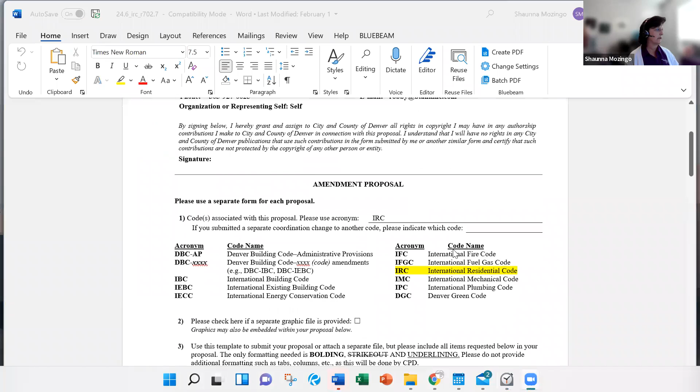All right, well, with that, the first item on the agenda is item number P 24.6, which is for the IRC's section 702.7. The proponent for that is Robbie Schwartz. So we will bring Robbie over.

Are we just making him allowed to talk or actually bringing him over as a panelist? Everybody's doing it differently. Allowed to talk is easy. Okay. All right. Oops. Did I do that? Robbie? Hi, I'm here. Okay, perfect. Go ahead, Robbie.

Hi, this is Robbie Schwartz with Build Tank Inc. Thank you for the opportunity to bring this proposal back with modification. And I don't think that the modification is showing. This is what I downloaded off of Denver's website. Is there a modification that you sent me or to Erica? I sent it to, I forget. I believe I sent it to you and Erica. I don't remember for sure. Let me see if I can find it real quick. Sorry. I can share my screen in the short term if you'd like me to. Okay, let me see.

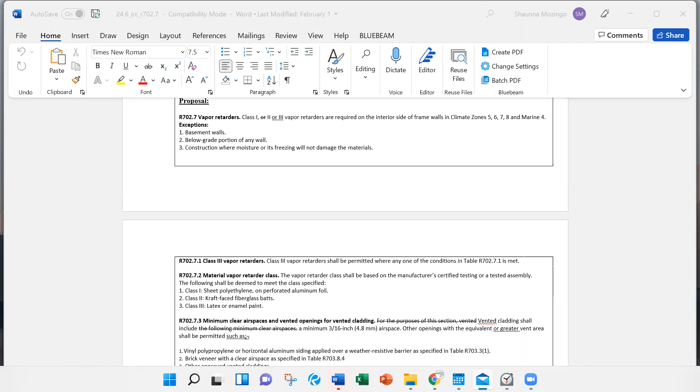And I got it off the Denver IRC site. Oh, you did? Huh, because I downloaded these just like last Thursday. There might have been some changes in between then, Shaunna. Okay. All right, well, maybe I'll just real quick. This is to be a good lesson in how to find those proposals on Denver's website, right? So here you go. City. Well, it would if I could type correctly. There we go. I had a quick link on there. All right, so all of them are on here. They're in the IRC. And this is for 702. I took it from the agenda. It should be the same link. Oh, there it is. Yep, that's it. Okay. Sorry about that. Great. So here's the proposal amendment.

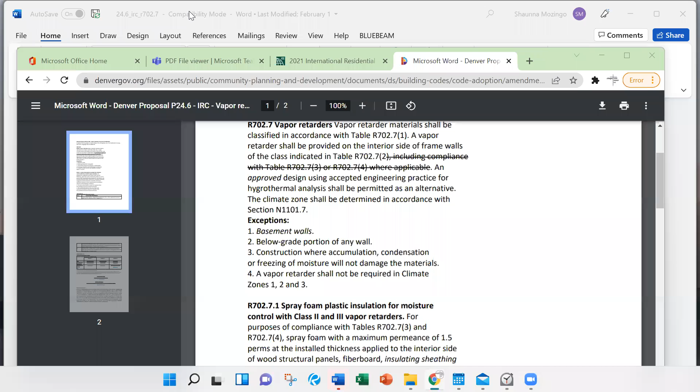Okay, so thank you again. This is Robbie Schwartz at Build Tank Inc. Thanks again for the opportunity to bring this proposal back. Nate and myself have met and listened to what the committee's questions and concerns were. And what it came down to is that vapor transport occurs via vapor diffusion through the wall that the vapor retarder is trying to manage, and also through air leakage into the wall. We're really fortunate in Colorado that we live in a forgiving climate, and that vapor diffusion is a small process of the vapor transport mechanism. And we're required to build our houses to at least 3 air changes per hour. So we're basically addressing the issue of vapor transport into our wall assemblies via air leakage into those assemblies.

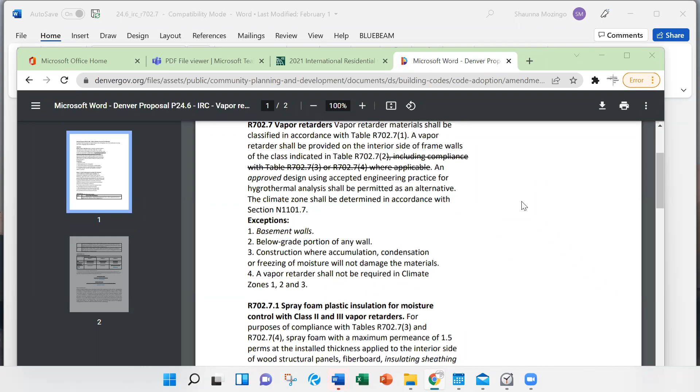So Nate and I have amended this proposal in 2 ways. First, we realized that we were using the wrong version of the code. And so we put in the correct version of the code for the baseline, which is the 2021 IRC. And then we took out tables R702.7(3) and 702.7(4), which are the tables that give you an explanation of when and how you can use a class 3 vapor retarder. And instead of that, in table 702.7(2), we put that class 3 vapor retarders are permitted. Therefore, a builder has a choice in our climate zone of using either a class 1, 2, or 3 vapor retarder in their home.

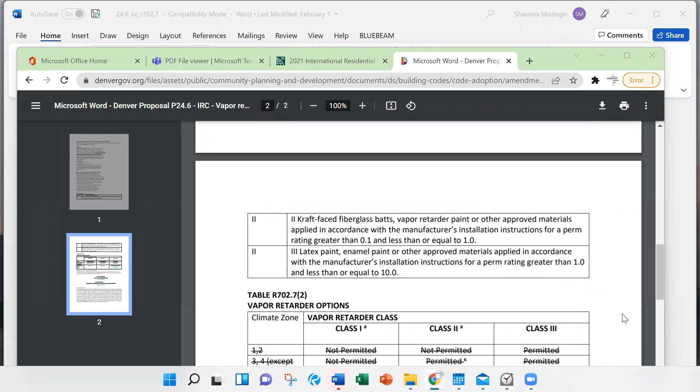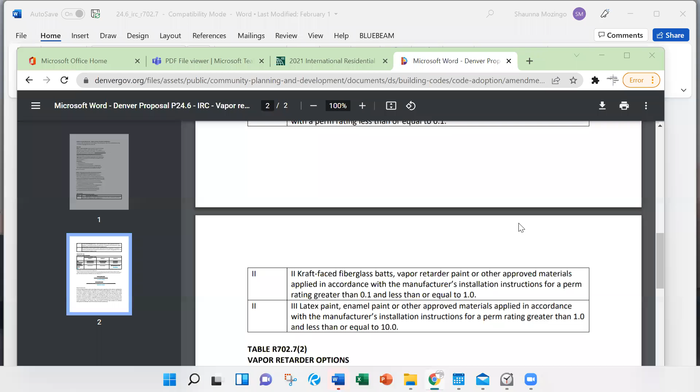And because we don't have a lot of moisture in our wall assemblies in the first place, and because we haven't seen issues with dew point condensation that would require foam exterior insulation, and because vented claddings can happen in other ways than described by those tables, we believe that this proposal allowing class 3 vapor retarders best represents what builders and the code jurisdiction of Denver should be promoting for houses in our climate zone.

Thank you, Robbie. It's just moderating too many hearings, I think. I forgot that we had introduced this last time, and there were some questions, and you guys agreed to work on it and bring it back. It's all coming back to me. So one thing that I would note is in this table 702.7(1), this is class 1, class 2, and this should be class 3, I'm guessing. Yes. So, but other than that, all right. So this was something that got discussed last time. We asked them to modify it and bring it back, and so they did.

So now we're going to go to the public. Thank you, and ask if there is any testimony in support of this proposal. For some reason, oh, there we go. Any testimony in support? Nathan. Oops. There we go. Nathan.

Yeah, so this is Nathan Scribdo with Brookfield Properties. Like Robbie was saying, I worked with him on modifying this, and it helps basically set the code up for our climate zone so that we are adjusting it to what we see here in Denver, and not trying to use just the generic class or

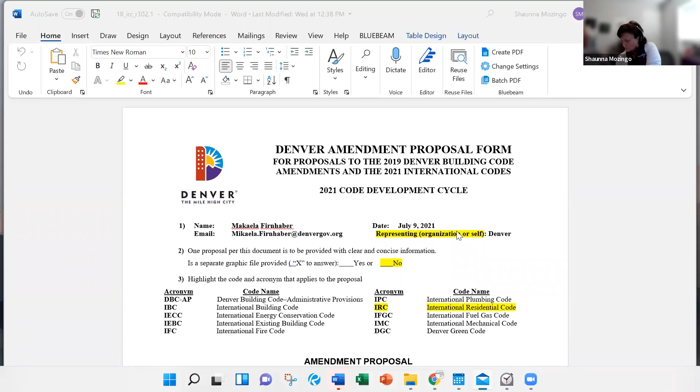All right. So then that brings us to item number 18, which is IRC 302.1. I believe this is the right one. No, that's not the right proposal. Well, I had these all in order at one time. At least I thought so. All right. Is this one? It says 302.1, but this is what's coming up under 18. Is this not number? This is 13. I don't know why this is happening. All right, I'm going to get rid of all of them.

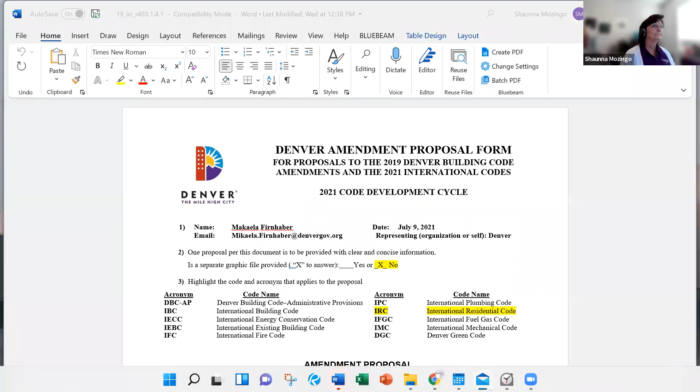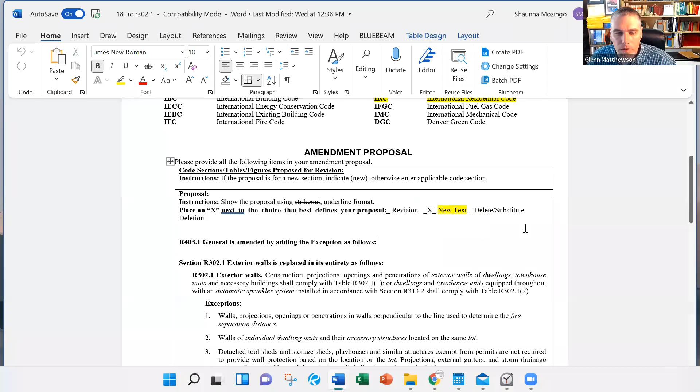Shaunna, I think there's a typo error on that. You notice the first part said R403.1 general. Yeah. That should not be there. Okay, because I'm like, wait a minute. Yeah, once you get past it, keep scrolling. I apologize. I'm not sure. I don't know. For the committee, you can just strike that. That is not meant to be part of this proposal. Okay, all right. So I looked at that and I was like, uh-oh, I have the wrong proposal. Yeah, that's why I spoke up. All right, thank you so much.

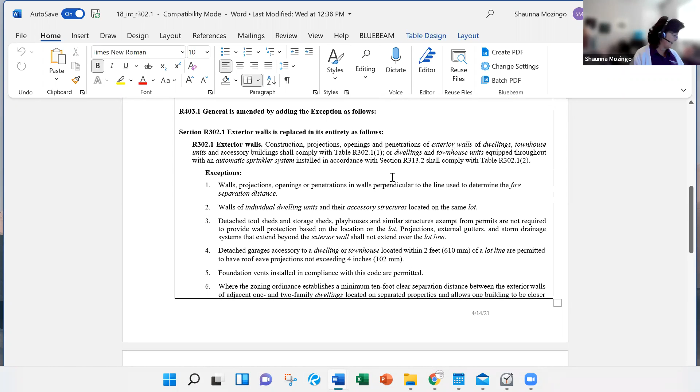All right, so this is R302.1 for exterior walls. The proponent was Makaela. I believe Makaela is out, but somebody else is presenting. So go ahead. I think Austin, maybe? Or who's presenting? I believe it's Casey. Okay. Hi, I'm Casey Vesque, plan reviewer for City and County of Denver. I'm representing Makaela, who wrote this, who is representing the city. Thank you. I think I got that right.

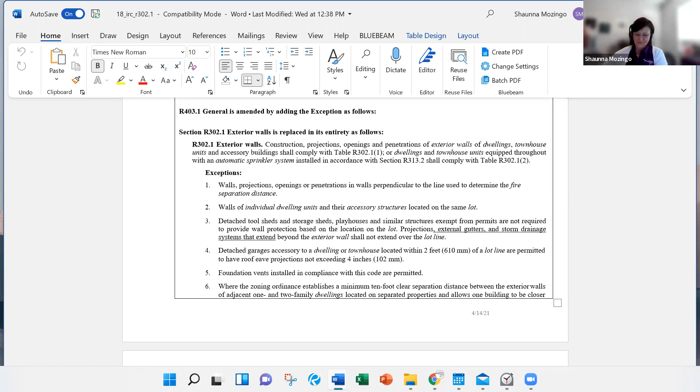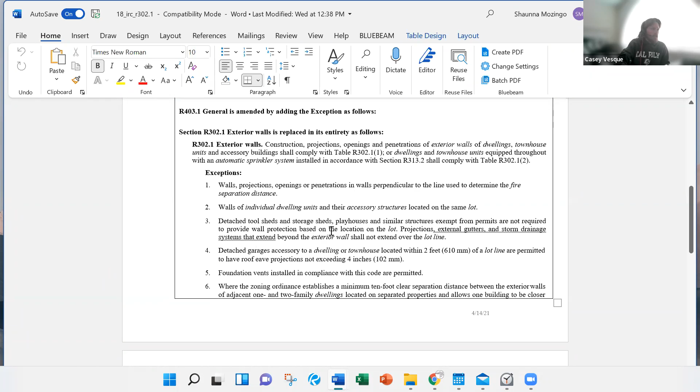Yep, perfect. So this one is about the fire separation distance, and basically adding external gutters and storm drainage systems to projections in exception number 3, and adding exception number 7: external gutters and other storm drainage systems are not considered projections.

The purpose of this is to reduce the misunderstanding of the public regarding how to measure fire separation distance for projections when external gutters are installed. Denver staff is currently interpreting the code such that external gutters are not part of a projection beyond an exterior wall for the sake of fire separation distance.

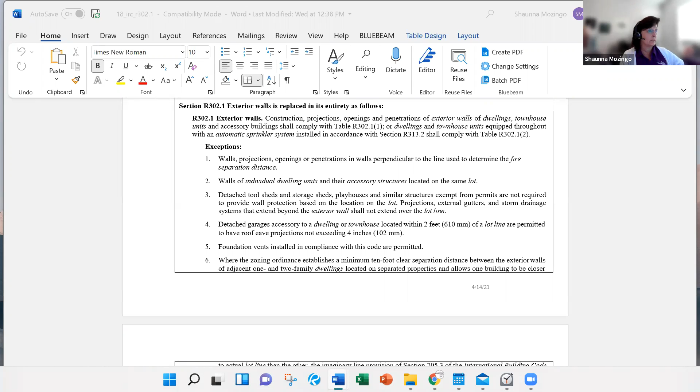Excellent. Thank you very much for presenting that. All right, we're going to go to the public. Is there any public that would like to speak in favor, in support of this proposal? Any public wishing to speak in support of this proposal? Any public in support? Any public wishing to speak in opposition to this proposal? Any public wishing to speak in opposition? No opposition? All right, seeing none, I will go back to the committee.

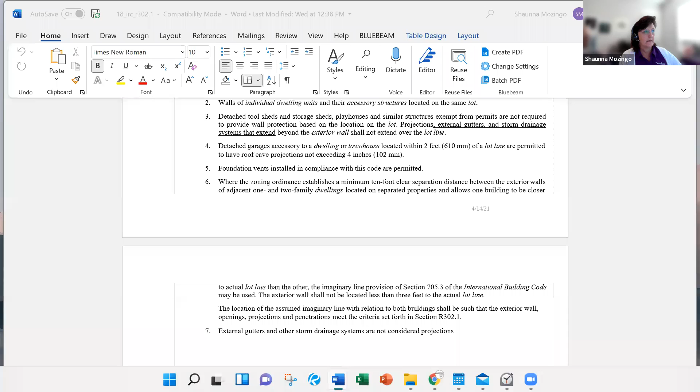Committee, do you have questions of the proponent? Anybody have questions? No questions? All right. There was no testimony from the public, so nothing to rebut. So I will look to the committee for a motion, so that we can open discussion. Kate? I'll make a motion to approve this code change as written. Okay, perfect.

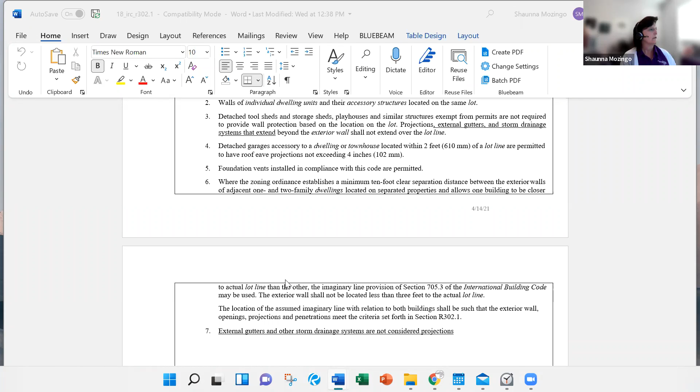All right, there's a motion for as submitted. Is there any second? Casey? Are you seconding? Yes. All right, so we have a motion and a second for as submitted, this proposal. Is there any discussion? Anybody wishing to discuss this proposal? Well, all right. Seeing none, then we will go to the vote.

All of those committee members in favor of this proposal as written, please raise your hand. One, two, three, four, five, six. That's a unanimous vote of 6-0 because we only have 6 voting members present. All right, so that proposal passes unanimously, 6-0. All right, with that, then we will go to, hopefully I have the right version of the proposal, 79B.

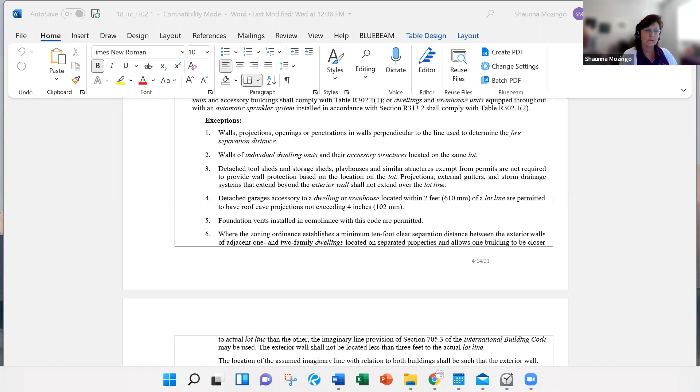Oh, Shaunna, I think Kristen Salinas is trying to get into the meeting right now. You might want to move to the next one and then come back to this one. Okay, that works because I need to find the version you gave me anyway. All right, so we're going to postpone 79B for a moment and get to P13. So P13, right here. Let me get rid of this proposal so it's not in our way. All right, I'm just having a real great time here. There we go. Proposal P13, Alicia Bock, dealing with IRC section 403.1.4.1 frost protection.

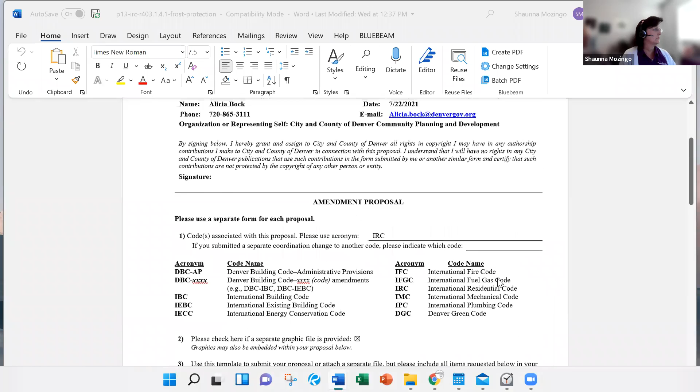All right, is the proponent here? Let's see. Is the proponent here for this, for Alicia or somebody else representing Alicia on this proposal? Nobody to present. Okay. I can speak for it if needed. That's my role. Yeah, that would be fine. Sure, thank you, Glenn. For those of you who don't know, Glenn Mathewson is the subject matter expert serving this committee.

Yeah, so the concerns with this one are the terminology used currently in section 403.1.4.1, "extended below the frost line," as if you would need to excavate further than the 36-inch established frost line depth. And that's generally not how that is really interpreted, beyond even just Denver; most places will interpret this as simply excavating to the frost line. And so that's what this is doing, just adding some clarity that for the Denver 36-inch frost line, you only have to reach that. You don't actually have to be below that. Excellent. Thank you very much, Glenn, for presenting that for our proponent.

All right, is there anybody from the public that wishes to speak in support of this proposal? Anybody wishing to speak in favor of this proposal, just raise your hand. Support. All right, anybody in opposition to this proposal? Opposition? All right, I don't see any opposition. Committee, do you have a question for Glenn? Anybody have questions on this proposal? Austin?

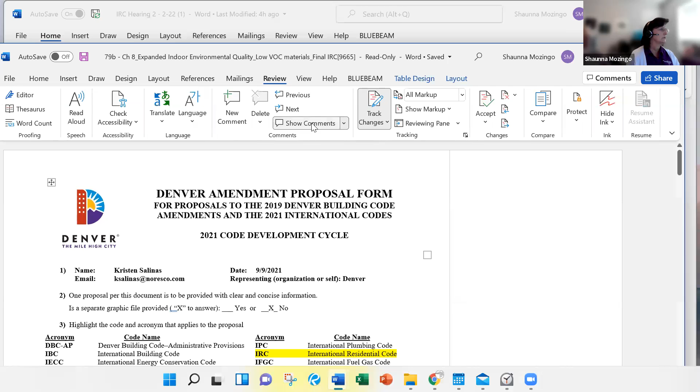All right, with that, I'm going to go to call to the floor. We're going to go back to item number C, which is 79B, but I need to pull up the actual correct proposal. I'm going to lower that because I need to save it. Erica, I did email it to you. Yeah, I'm going to pull that up real quick. There we go. Oh man, I get way too many emails. Here we go. All right, here is the proposal. I'm going to take it out of review. Can I take it out of review? No markup. There we go.

This is a proposal out of the DGC, the Denver Green Code, to bring it into the code. The proponent, Kristen, are you available to speak? I might have to allow her to talk. There we go. I am here. Can you- Whoa. Let me mute everybody to see if Kristen can come through without an echo. All right, go ahead, Kristen. So I'm trying on the phone. Hold on. Okay, can you hear me now? Yes, sounds great. Go ahead, Kristen. I'm not sure, I'm getting an echo. We are not. Okay, well, I can probably listen to myself on echo.

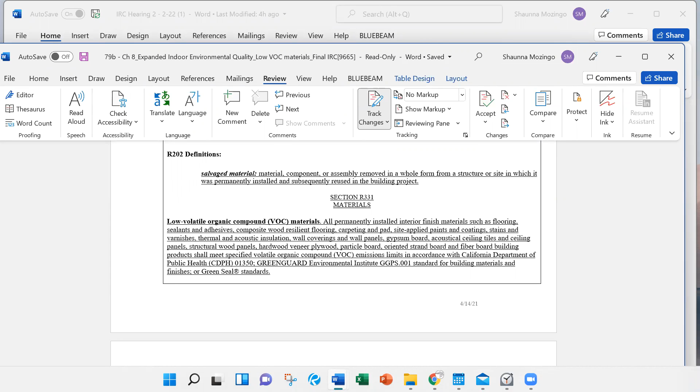Sorry about that. So this is a proposal about materials, and it's about the VOC content of materials. And this is moved out of DGC into mandatory, like Shaunna stated. We have a number of types of materials listed here that would be included in this requirement. We have left out the furniture, which is typically a little more challenging to do in the DGC, but we have included a lot of the material categories that align with the City of Fort Collins requirements, the LEED requirements, and other jurisdictional requirements in other states that require this disclosure. So this is really just a VOC emissions limit requirement, as well as the testing requirements allowed by the California Department of Public Health standard, which is very typical across the US for VOC.

We've also excepted salvage material. So if it's some type of refurbished or refinished or salvage material that's come from another location, that does not include it. So this is really just new permanently installed finished materials.

All right. Thank you. All right, we're going to go to the public. Are there any attendees in the public who wish to speak in support of this proposal? Testimony in support of this proposal? Any attendees in support? All right, are there any attendees in opposition to this proposal? Any attendees wishing to speak in opposition? No opposition. All right. Committee, questions?

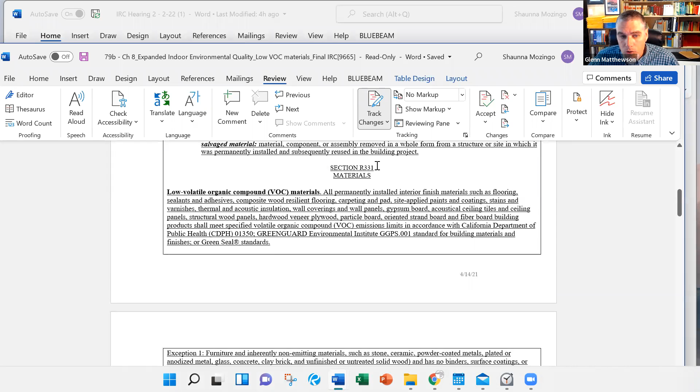If I may, Glenn, before we hand this to the committee, I just want to clarify to the committee that in the title, this will be identified as section R331.1. Just for nomenclature, that was overlooked. I should have added that in there. Oh, right here. Yeah, this would become the only section in the new proposed section 331 that creates an area that you could further regulate materials if you chose. But yeah, this would be 331.1.

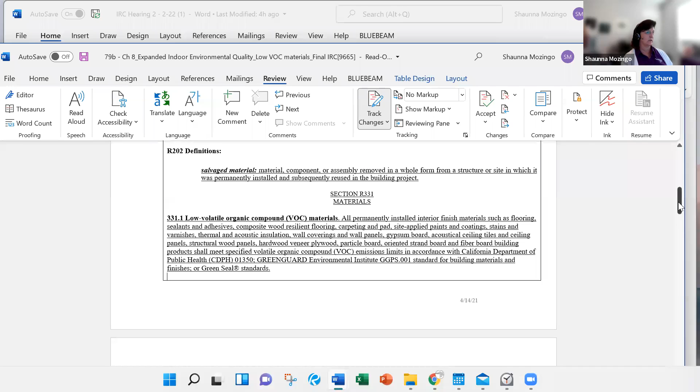Thank you. All right, anybody from the committee have questions that they would like to ask the proponent? Paul. Yeah, I just wanted to check in, and I know that there was a companion one to this for the IBC, and it was 79A, I believe. And it's my understanding that that one was turned down by the IBC committee. And I believe it had something to do with the references that were struck down with regards to the DGC references. I just wonder if we can get some clarification of their reasoning behind not approving the IBC version of this.

Yeah, go ahead, Kristen. Sure. So I was on that one, and the way I think that we presented that was a little bit confusing. It was under a flooring section. So we revised this specifically after that hearing to make sure that we were capturing the correct information that we wanted to correct. So there was an issue with the California public health standard. However, that is really the testing requirements that are used within the LEED rating system. So it's not just a California testing standard. So we left that in. And to my knowledge, there's really no other representative testing compliance mechanism that is equivalent. So those were kind of the main issues there, why this was struck down.

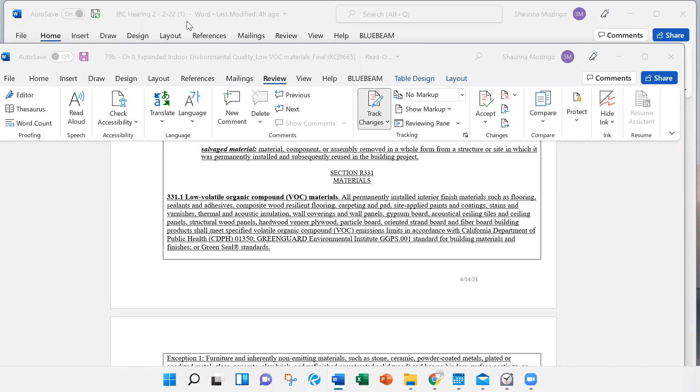Yeah, I can tell you that I serve as the subject matter expert for the IBC committee. And so it was voted down last week. It was a vote of 11-0 with 2 abstaining. And I can confirm those were the reasons that they turned it down. Mostly the reference to the California standard. And it was in a different section. It was in a flooring section. Yeah, so we tried to clarify that as much as possible for this hearing. Right, Paul, any other questions? Nope, that was it. Thank you for clarifying.

Okay, yes, anybody else? Questions before... yes, Austin. You guys hear me now? Yes, we can. All right, success.

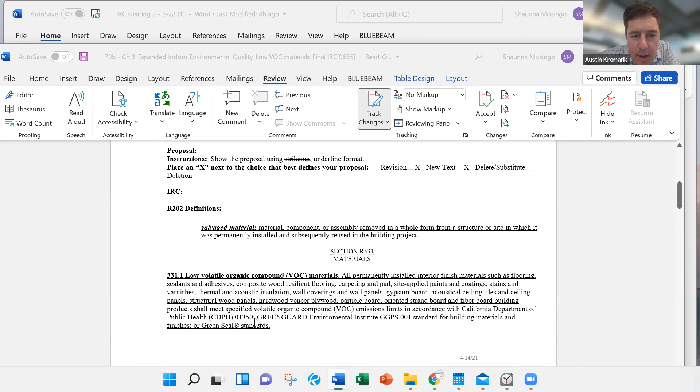Thanks for putting up with my comments in the chat earlier, but also for the California standards, if we link to an outside standard and that standard changes, what does that do to the code? Do we have to revisit at that time, or does it automatically update as the standard changes? It depends on how you reference the standard. I guess I'm not the SME on here. Glenn, would you like to answer that question? The problem is I don't see the standard. Oh, right here. Yeah, it's just in that first paragraph, California Department of Health, right here.

So normally what happens is when you reference a standard in the code, I don't see that they added the standard the way, but when you reference a standard in the code, let me just see, this is not anything you guys are doing. This is reference only. It's down at the bottom there. Here we go, reference standard. Generally, when you reference a standard in the code, if you reference the whole standard without a year or an edition, then it's as that standard moves along in time.

So normally, because you guys are adopting a code today, you would reference the standard with the edition, like right now, IBC 2021, or you would say UL standard or California Public Health Standard 1350-22 or 21 or whatever date it is that they created that, because they're going to write a new one and then it will change. And so there usually is a date associated with a standard.

So you guys would have to decide if you want to adopt the standard with a moving date, and when somebody comes in with a project, it's whatever is in effect at that time. Or if you want a date specific, like we want the California Public Health Standard created on July 1st, 2017, or whatever it is. So I don't know if there's a specific date of these standards that you're putting in place, Kristen. I think the most recent is 2017, which is version 1.2.

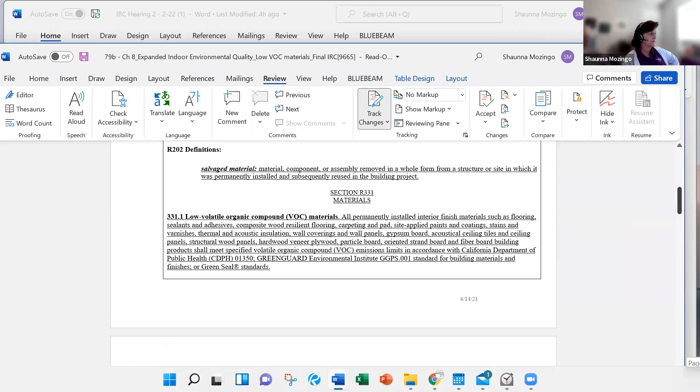All right, so that brings in some information. Does the committee have additional questions before I take it to the public for rebuttal? Any more questions on the whole proposal, whether it's about the standards or about these materials or the definition? I don't see any other questions come in, so I'm going to go to the public for rebuttal. The only thing you could rebut is something about the standards or about what happened on Denver's hearing, on the IBC hearing, because those are the only two things discussed. Is there any testimony from the public about those two items? Seeing none, I'm going to bring it back to the committee.

Committee, at this time, I would take a motion so that we can have discussion. Paul? I'd like to make a motion to approve as modified. Okay. And can you clarify the modification? The modifications to the reference standards. Okay. All right, is there a second? I'll second it. Was that Kate? Yep. Okay. All right, discussion. So the proposal is presented to you as modified, the only modification being the update to the versions of the reference standards. Any discussion? Any discussion at all? No?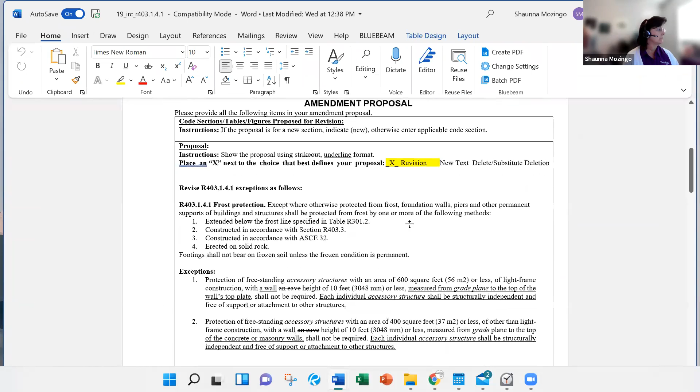All right, I'm going to lower that one. All right, so moving on, thank you. We are on item E, which is proposal 19. This is Michaela also, the R403.1.4.1. So testimony, the proponent, I think that's Casey, speaking for Michaela. Yes, my name is Casey Vesque, residential plan reviewer for City and County of Denver. I'm speaking on behalf of Michaela, representing the

city. So this is mainly to deal with the eaves and how we measure the eave height for these exceptions with the accessory structure. So basically, the way we're adjusting is with a wall, as underlined, and crossing out the eave height of 10 feet or less measured from grade plane to the top of the wall's top plate. Each individual accessory structure shall be structurally independent and free of support or attachment to other structures.

And that's in exception 1, and then exception 2, we changed it as with a wall, crossing out the eave height of 10 feet or less measured from grade plane to the top of the concrete or masonry walls shall not be required. Each individual accessory structure shall be structurally independent and free of support or attachment to the other structures.

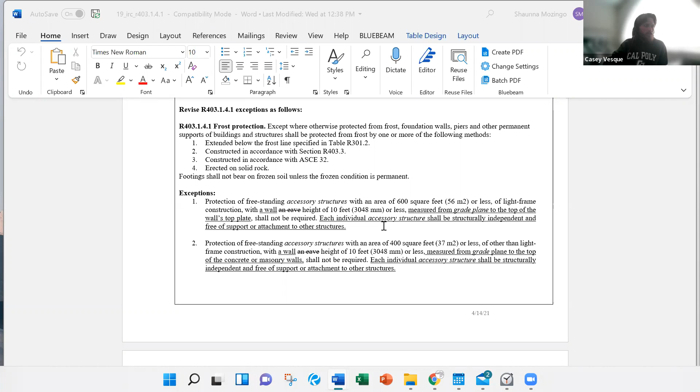So this proposal clarifies the height measurement of freestanding accessory structures that meet the exception. This proposal also clarifies when accessory structures will be considered 1 versus 2 structures in terms of applying this exception. The clarifying language answers the questions above, like how is eave height measured? Can we consider duplex garages with a common wall to be 2 separate structures? And it just gives us that clarifying language and makes it easier for applicants.

Sorry, I was muted. Thank you very much. All right, let's go to the public. Are there any attendees that would wish to speak in support of this proposal? Testimony in support? Opposition? Anybody wishing to speak in opposition? Raise your hand. Opposition to this proposal? Seeing none, I'll come back to the committee. Committee, it looks like somebody was raising their hand, but they put it back down.

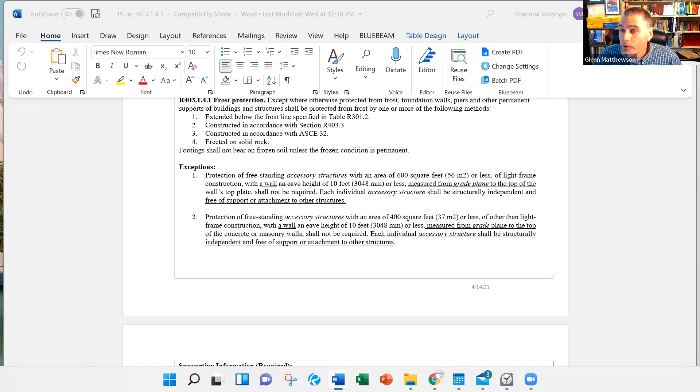And so the reasoning for structurally independent and free of support is to say, look, you can have your duplex garage, that's fine, but you would have to have 2 independent monolithic slabs, not greater than 600. So that was just a little more clarity to the reasoning for that final sentence. Thank you very much.

All right, committee questions. Austin. Thanks for that information, Glenn. I'm just curious from a building standpoint, why does it matter if it's a 1,200 square foot monolithic pour versus 2 600 square foot monolithic pours? This is actually a pretty historical provision. There was a fair bit of research done in trying to come up with what that wall height meant. And from what I can understand of this provision, as far back as we've had this,

obviously frost protection is the ideal, but this is trying to be a gentler and kinder code for moderately sized accessory structures, where your risk is lower due to it being an accessory structure. Your risk of failure is lower due to the limited eave height, as well as your exposure for wind and seismic loads. I really don't think there's a lot of science to that 600. It's just been that long accepted limit where we're willing to have a less secure foundation system up to a gentle size. That's really, from what I have researched, the answer.

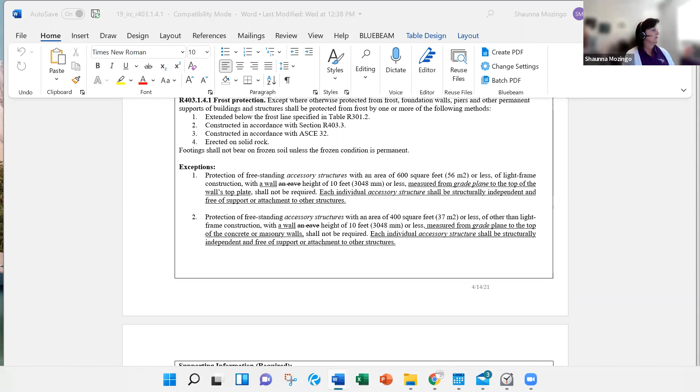We have 5 in support. All those in, oh, let me lower your hand one moment. All right, all those in opposition, please raise your hand. Mr. Pruitt, 1. All right, and so no abstains because it's 5 to 1 to 0. All right, the proposal number 19 has been approved as submitted with a vote of 5 to 1.

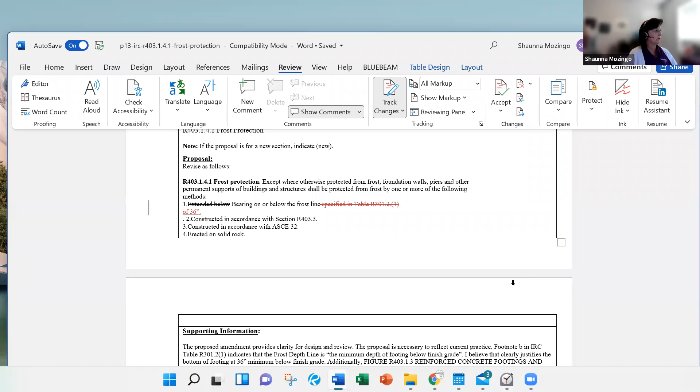Again, I would just ask, it helps us to have on record for the next cycle, when these things get heard or when people ask questions, did you think about this or did you think about that? It's good to have on record not just the support, but the opposition as well. So please speak up. All right, I'm going to call to the floor item number 6.

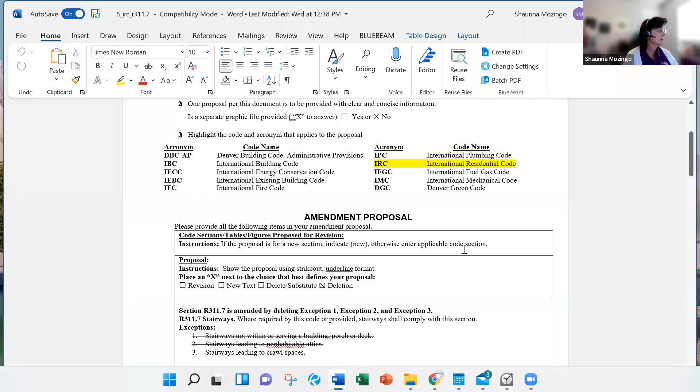Item number 6 is for R311. Again, this is Amir. All right, I will go here and make sure that I don't see Amir available. Is somebody from the city representing Amir on proposal number 6? This is a City of Denver proposal, so is there somebody from staff to present? I believe Glenn was going to present.

I can. Okay. Yep. So these are some changes in the 2021 IRC to this section 311.7. There was a lot of discussion there as far as to the extent that section 311 is applicable as a means of egress section. And so the point of 311.7 and the change in the 2021 was to make it clear which stairways needed to comply with all of the geometric and other stairway provisions in the IRC and clarify which ones would not. And so that's what we see here, these new exceptions that would not need to comply with any of the provisions in the IRC for stairways.

The concern from the proponent here and from the staff in their discussions was primarily what makes Denver unique to this and why this is maybe not appropriate to Denver: Denver is a more urban environment with denser properties, with most likely more density coming in the future to handle some of the housing concerns. And with that density, the pathways from the properties out to the public way become a little bit more defined as opposed to a single family home with a large lot and lots of pathways you may choose.

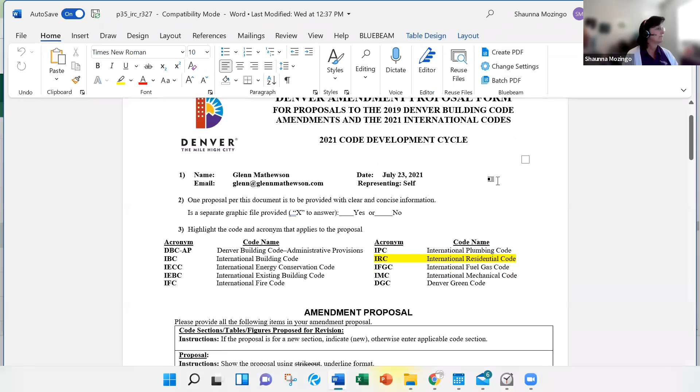1, okay. So item number 6, which is the stairway exception, has been disapproved with a vote of 5-0 with 1 abstention. Thank you very much. Let's move forward. We'll call to the floor item number P35. Here we go. All right. This is proponent Glenn Mathewson. Mr. Mathewson.

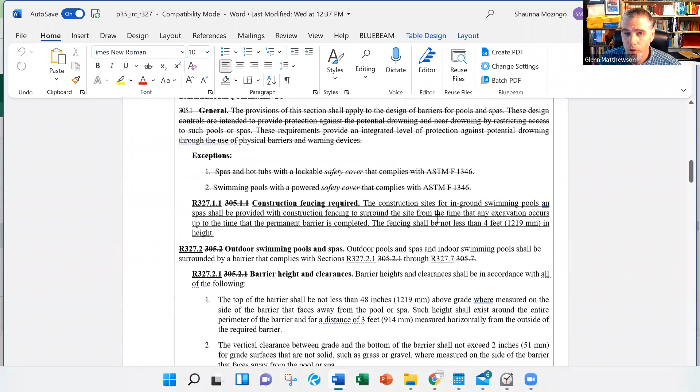Yes, so part of the scope of work in assisting Denver with this code process and adoption was to look for other opportunities where we felt as consultants that their adoption package and amendment package could be made more clear and useful to the public. Currently in the Denver code, the 2019 edition based on the 18 model codes, you had a newly created Appendix U. This was taking the 2015 International Swimming Pool and Spa Code provisions 305 for security barriers around pools and putting it back into your local IRC.

The reasoning back then was, in the changes from the 2012 to the 2015 IRC, the provisions for security barriers used to be in an appendix in the IRC, but with the newly developed International Swimming Pool and Spa Code, actually that was in 2012, they pulled these security barrier provisions from the IRC and placed them into a separate standalone code. That seemed appropriate because it's related to pool installations. However, it made those provisions a lot more inaccessible to the public.

These provisions for security barriers around pools cross between the pool contractors and your regular contractors doing things like fencing, decks and other items. So Denver wanted to make that more accessible and put that in their appendix. However, when you went from 2015 to 2018, Denver kept one wording of the 2015.

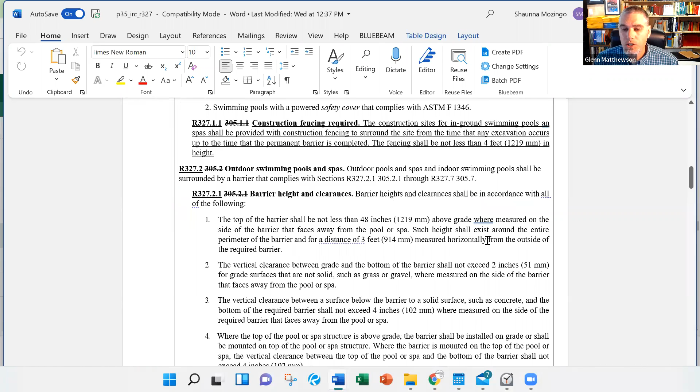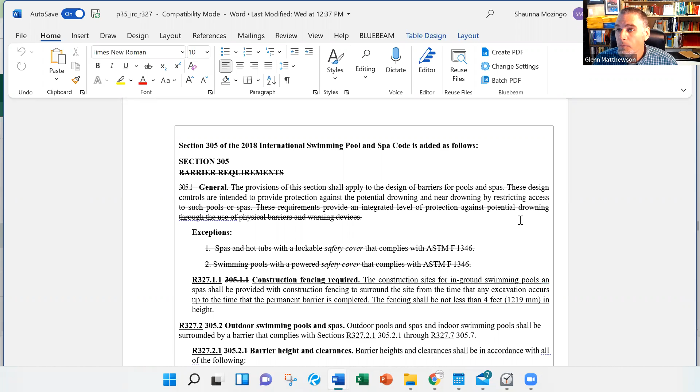So your current 2021 code adoption would have had an appendix with provisions of the 2018 and 2015 pool and spa code. And so this proposal simply gets rid of Appendix U and goes ahead and changes the reference in the Chapter 3 section of your IRC. Instead of referencing over to the swimming pool and spa code, you'll see right there in general, that's been changed to now simply include all of section 305 directly into chapter 3 here, and make it much easier for both staff and public to access these important life safety provisions.

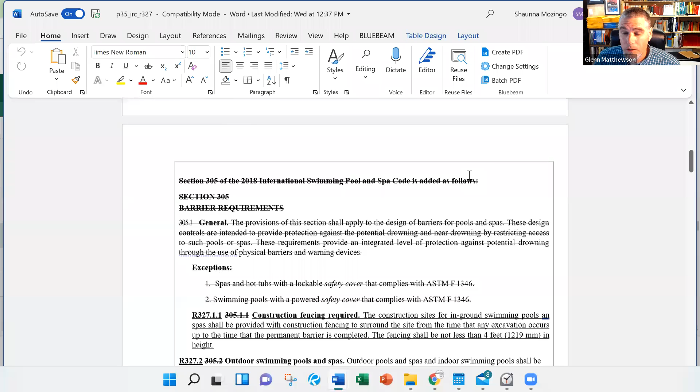And one note is one part of the swimming pool and spa code in section 305, the last subsection speaks to a subject that would only be an IBC issue. I believe it's about means of egress. I can't go off the top of my head here. And that is the one part that was not pulled over, since it would not be appropriate for IRC structures. Excellent. Thank you very much. All right.

Let's go to the public. Is there any public that wishes to testify in support of this proposal? Support? Any testimony in support? Opposition? Anybody wishing to testify in opposition to this proposal? No, no opposition? All right. Committee, any questions of Glenn? Any questions of Glenn? Seeing none, we will have no rebuttal. And I would ask the committee for a motion and discussion.

Casey, motion to approve as is. Okay. Is there a second? Paul, is that a second? All right. I have a motion and a second for as submitted. Do you have any discussion? Austin?

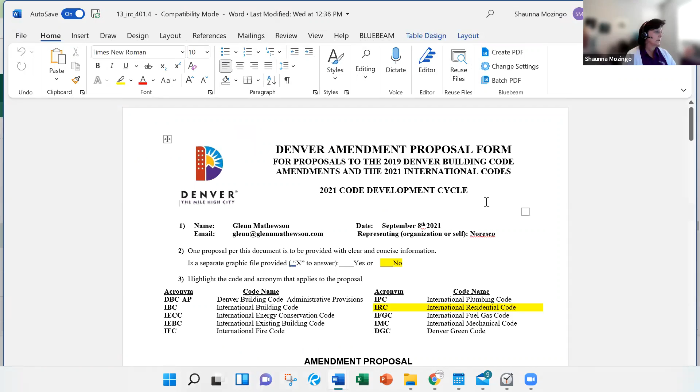All right, that brings us to, we only have one more. I was going to take a break, but we only have one more. So we'll hear item number 13. Item number 13, also Glenn. Yes. So this was another one of those, as working as a consultant for Denver here and with the Noresco team, Denver had identified some policies that live alone as separate documents, and if those can be incorporated right into the larger amendment package, it would be more convenient for staff and public to be able to access that information.

And so I was asked to look at the policy for when professional geotechnical soil analysis is required for single family homes in the IRC and townhouses. And there was a lot of overlap. Hopefully you guys have had a chance to review this proposal prior, but I'll be happy to answer any questions, because there was some overlap between your current amendments to section 401.4 and subsections, as well as the policy, which brought in some terms. The policy has defined terms for helical piles, deep foundations, some of these other foundation types.

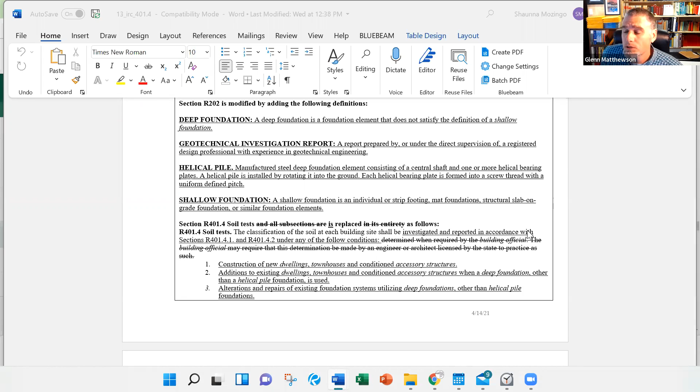However, these definitions in the policy did not match how these same terms are defined in the IBC. So I did alter these definitions slightly so that they match exactly to the IBC definitions, and then include them into the IRC, since these are terms utilized in Denver's amendments. And essentially, my goal was to not change any of the intent, simply present the information in a more accessible manner.

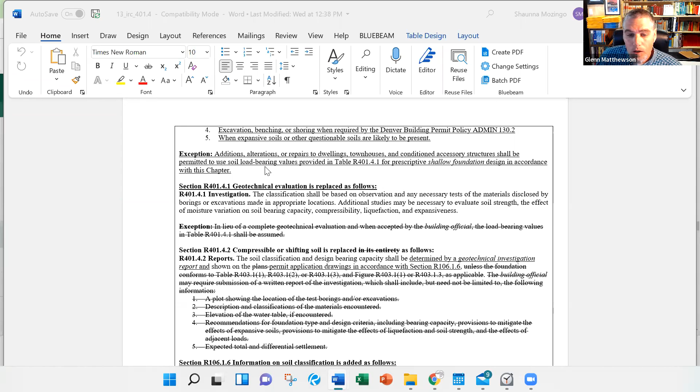And what you do see here is maintaining the prescriptive soil bearing capacities that the IRC provides in table R401.4.1 to make sure that those could still be utilized for your additions, alterations, and repairs that are not utilizing a deep foundation system or helical pile system. So like I say, it's a bit of a heavy proposal because it combines a number of documents. But I would stress that the intent here was to not change the intent or application of these provisions as currently written. Thank you, Glenn.

All right. Is there any member of the public that would like to speak in support of this proposal? Testimony in support of this proposal, R401.4, proposal number 13. Testimony in support. Testimony in opposition. Anybody wishing to testify in opposition of this proposal? Seeing no opposition, we'll come back to the committee. Committee, do you have some questions for Glenn?

No questions? I would like to let the committee know that this was also sent for review by the Denver staff members that were part of the review team. Thank you. All right, I don't see any questions. One last time, going once, going twice.

All right, I will take a motion and discussion on this proposal. Casey? Motion to approve as is. All right, is there a second? Austin? Yeah, I'll second that. All right. And so there's a motion and a second for approval as submitted of this proposal. Is there any discussion? Any discussion? No. All right.